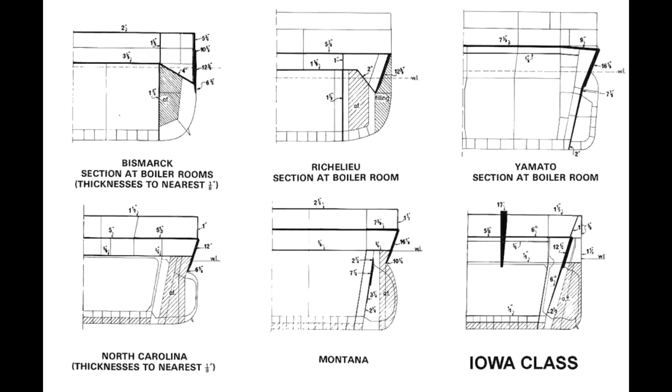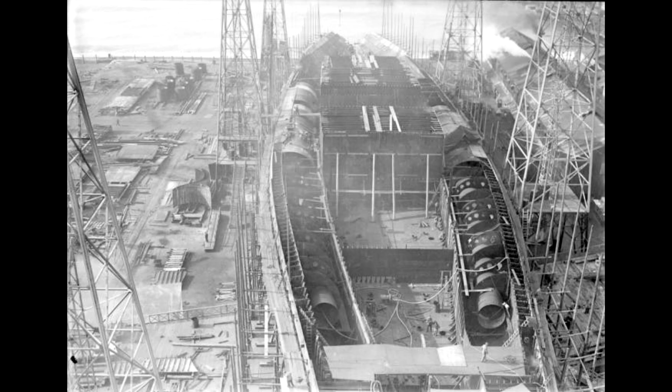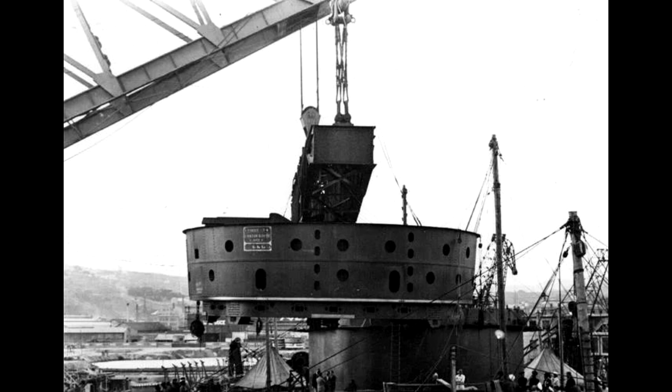Except for the Italians. During the interwar period, the Italian Navy, the Regia Marina, was trying to find a way to protect its proposed new battleships against incoming shell fire, but in a way that would give greater protection without the corresponding increase in weight that would result from simply slapping on a bunch more steel. Note that this was not because of a limitation on the Italian steel industry's ability to make thicker armour. The Littorio's turrets, for example, had 15 inches of armour on their faces. It was just an attempt to save weight generally, because weight saved on armour was weight that you could use in something else.

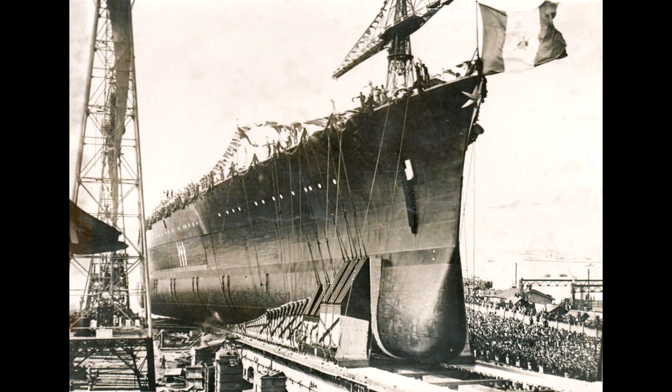But ever since, there have been discussions as to whether or not their solution actually worked, not helped by the fact that no Littorio was ever struck on its belt armour by an incoming enemy shell during the Second World War. Unfortunately, the physics and the engineering involved is somewhat more complex than standard battleship plate armour, and this means that some people on both sides of the argument deeply misunderstand what they're actually talking about.

There are some who say it just didn't work at all, and the Italians would have been better off just having the 11-inch thick internal layer. That's not correct. But there's also some who say, well, no, the Italians tested it and it worked, and therefore it works as advertised, and anyone who questions it is just being silly. And they're also wrong, because, well, we'll find out.

After some thinking and experimentation, the idea that the Italians settled on was to rely on what is known as decapping incoming projectiles. As you'll hopefully recall from the video that we did on shells versus armour, and if you don't recall that, there's a good chance to go and watch that video again, an incoming armour-piercing shell consists, at least in World War II, of three primary components. A windscreen, which is present purely for aerodynamic purposes and gives it a long pointy appearance, and has negligible importance in terms of armour penetration.

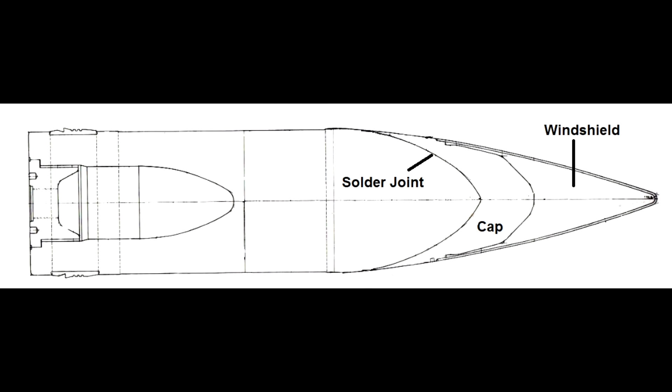Then there is a hardened armour-piercing cap, which in very brief terms essentially sacrifices itself to inflict maximum damage on the armour plate without causing the main body of the shell to suffer damage. And then you have the shell's main body, which contains the explosive charge and is capable of a certain amount of penetration itself because it is the primary mass of the shell, but it is made of a slightly softer steel that is better at holding itself together, but less capable of punching through face-hardened armour, as compared to the steel the AP cap is made of.

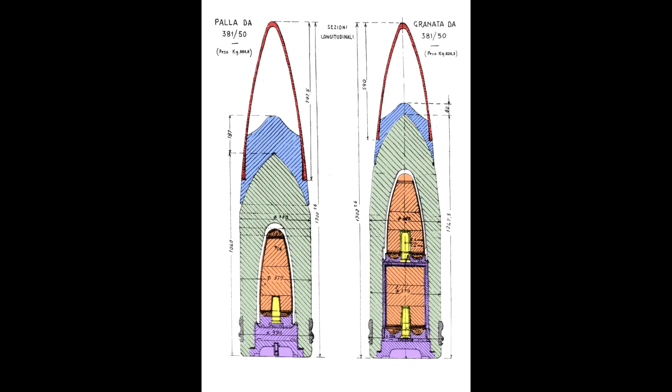Now, the armour-piercing, or AP cap, had been introduced to naval shells a little bit prior to World War I, largely in response to armour thickness and material getting good enough to be able to relatively easily resist an incoming shell that was just made up of a shell body and a windscreen. A softer-bodied shell would just collapse, concertina up like an accordion, and a harder-bodied one would shatter, assuming that you had a reasonable thickness of armour on your ship.

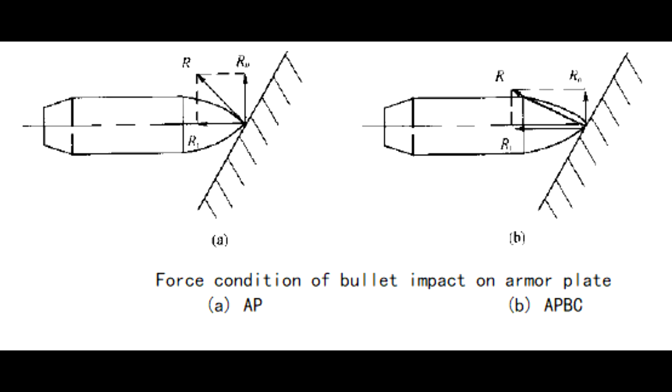Hence, the armour-piercing cap was invented, which essentially, again very briefly, split the problem of absolute penetration and coherent payload delivery into two individually solvable tasks. Due to their disposable nature, as well as certain physical interactions that required the cap and body to be somewhat separated to work, armour-piercing caps were only held on to the shell bodies by relatively minimal means. In some places, small contact points, in other cases, light soldering, in some other cases still, a little bit of crimping, and in a few cases, some combination of the above.

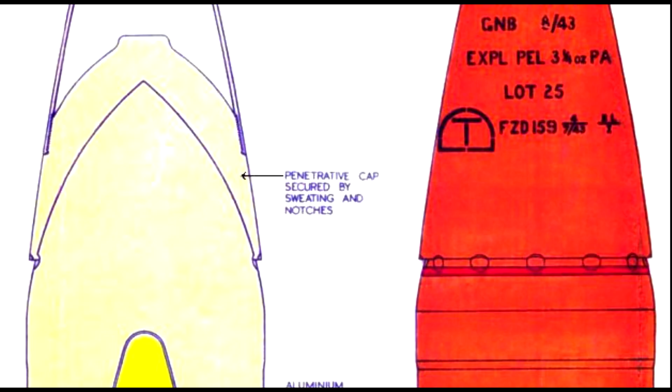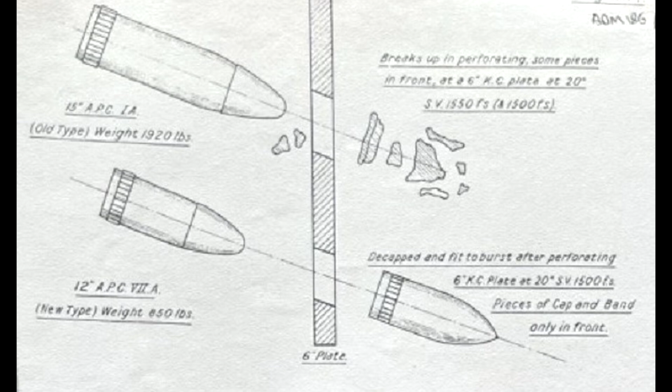So, it seemed obvious that if you could come up with a method to detach the cap from the shell prior to the shell hitting the main armour belt, then the belt itself could be made substantially thinner and thus either lighter, or it could cover a larger area, or you could do a halfway house of both, and still expect to resist incoming fire. The potential for shells to lose their caps was already quite well known in the various major navies, as another way of causing this to happen was simply for the shell to impact at a relatively large angle to perpendicular. This effect was one of the secondary reasons for the advent of deliberately angling armour belts in the early 1920s, a trend which would continue in some navies into the 30s and 40s.

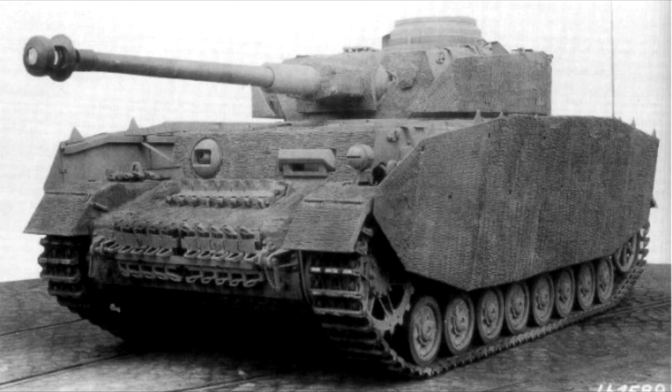The simplest way to effect decapping a shell deliberately and consistently was to just put an additional barrier ahead of the armour, so the shell would hit that first. This would just be a thinner sheet of steel. If this sheet of steel was thick enough, then it would exert enough force to break off whatever means was being used of holding the cap to the shell body, and potentially even shatter the armour-piercing cap completely if it was considerably thick, although in the latter case, a considerably thick decapping plate would probably negate most or all of the weight savings.

But since this general effect could have potential implications for certain kinds of tank ammunition, or more precisely anti-tank ammunition, as well, a number of different nations would conduct a wide range of tests using both naval rounds to look at the implication of potentially decapping incoming shells to protect ships, but they would also use smaller rounds that would typically be found in various anti-tank weapons of the interwar period to see if what we would know as spaced armour could work for tanks, specifically against capped armour-piercing shells. Of course, there is value of spaced armour against early HEAT and HESH warheads as well, but that's a separate discussion.

Now, of course, in the real world, the decapping effect of a sheet of steel would be affected by the angle of impact. But, at least for a battleship, if the alternative was a shell punching straight through intact and then hitting a thin main belt that would then also give way quite easily, it was best to assess these things according to a worst-case scenario, a perpendicular impact, or as close to as you are likely to get.

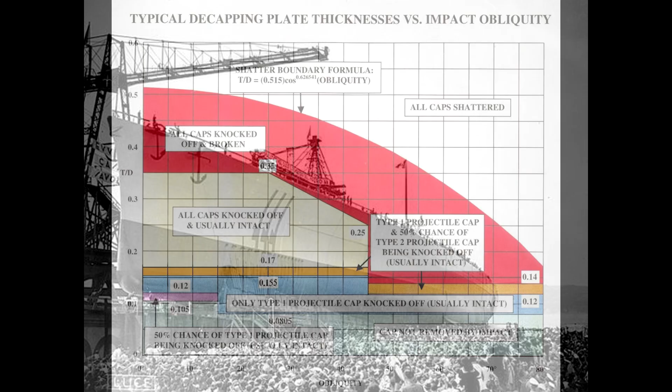Thanks to the various tests done by the different nations, it is possible to calculate not only how thick the decapping plate should be, but also how this might vary depending on the type of armour-piercing cap that a shell might be using. This has all been handily summarised in this chart by the late Nathan Okun, a fine scholar who wrote extensively on a variety of naval subjects, mostly to do with guns and armour, and with whom many of you will already be familiar. As you can see, to be on the safe side of things, while keeping the plate as light as possible, the ratio of plate thickness versus diameter of incoming shell should be at least 0.17. That's the upper boundary of the orange zone on the chart.

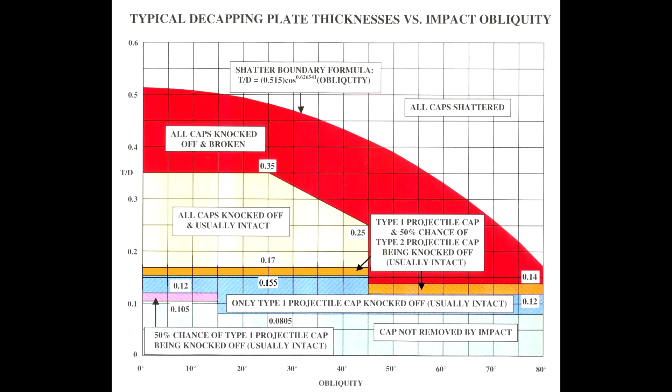So, going back to the Italians, they would test and then equip the Littorio class with an armour scheme that combined inclined armour, specifically at an angle of about 11 degrees, with the main belt being 280mm thick, or about 11 inches, which in and of itself would be immediately obvious as completely inadequate to deal with 15 or 16-inch projectiles that would be common in the late 1930s and early 1940s naval battles if left on its own, especially at the closer ranges that Regia Marina thought the battleship fights might come down to, which would be 16,000 metres or about 17,000 yards. This also, however, had a decapping plate, and that was 70mm thick, or about 2.8 inches.

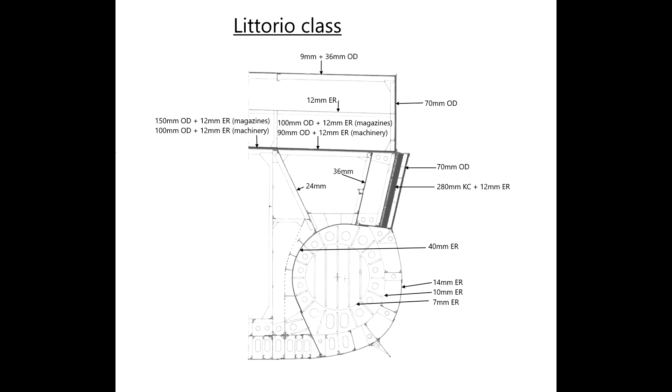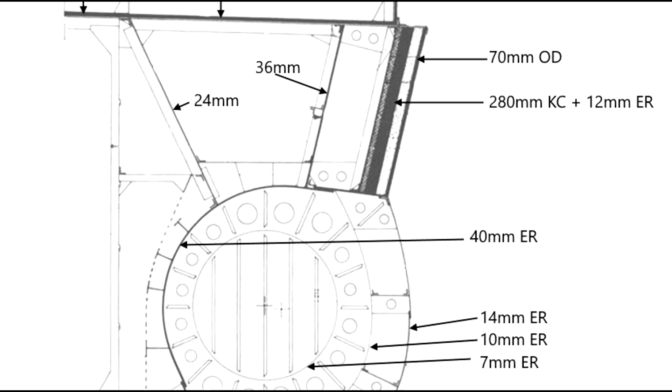So let's examine this at the first stage of things. Is the decapping plate actually thick enough to do its job? Well, the Regia Marina assumed that a 15-inch shell was its most likely opposition, and so we apply the previously mentioned ratio. 0.17 of 15 inches is 2.55 inches, and so a 2.8-inch thick plate would suffice with a little bit of a safety margin. It's in fact even 0.08 of an inch thicker than the minimum needed to be reasonably reliable against a 16-inch projectile. And in either case, the angle of the armour and the angle of fall of the shell would help a little bit with this as well.

Note, however, that 1.5 divided by 16 is about 0.094, which falls below the minimum ratio to knock any kind of cap off, even occasionally, and this is why the 1.5-inch STS outer plate on an Iowa-class battleship is not a decapping plate, something that Okun himself would confirm. Thus, the decapping plate on the Littorios should do its job of detaching the armour-piercing cap from the shell against pretty much any incoming threat, except possibly Yamato's 18.1-inch guns.

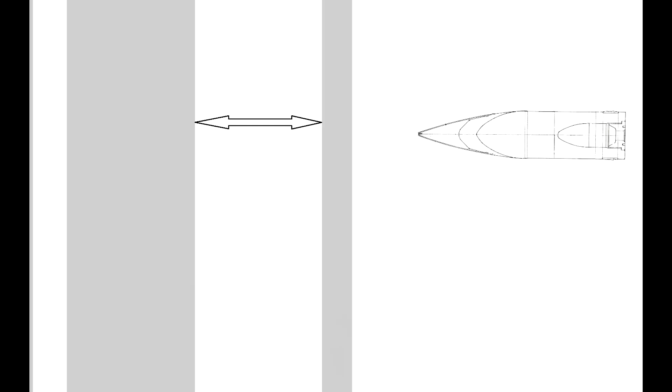But there is a second factor to consider: the distance between the decapping plate and the main belt. You see, once you've physically detached the armour-piercing cap from the shell body, i.e. you've broken the solder or contact points or whatever is involved, you then actually need the cap to physically separate from the shell by a certain distance, ideally completely. Otherwise, the cap is just sitting on top of the shell, just without anything holding it in one particular place, but then when it hits the main belt, the overall effect of that impact is likely to be similar as if nothing had actually happened at all, since the tip of the shell and the interior of the armour-piercing cap act a bit like a socket system anyway.

Plus, there is a risk at closer distances, in terms of the distance between the decapping plate and the armour belt, that the decapping plate itself may be carried wrapped around the shell to the main belt, and thus in and of itself act like an additional armour-piercing cap layer. As again we've seen in the shells versus armour video, you could get a plug of metal being knocked out of an armour belt, and this was not uncommon when heavy caliber shells hit steel. So, you need to have a decapping gap between the decapping plate and the main armour belt. And this, as it turns out, is proportional to the size of the shell impacting and the relative thickness of the decapping plate to that shell.

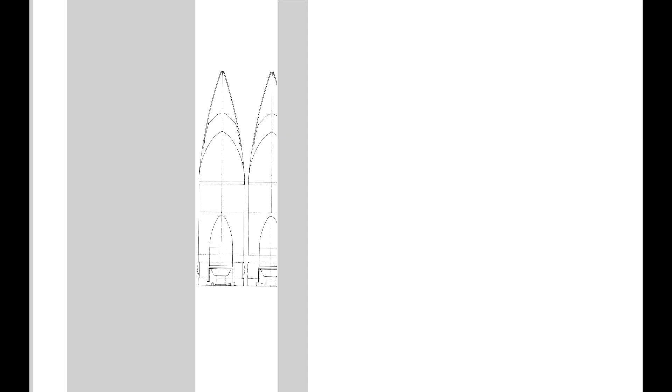In the various tests tabulated, the largest minimum successful gap recorded at a perpendicular or normal impact was about 3 calibers, and the lowest was about 1.6 calibers, with the change being related to the decapping plate to shell caliber ratio. Luckily, there is another formula that allows us to calculate the decapping gap needed, since 2.8 inches for the decapping plate, divided by 15 inches, the diameter of the shell that's being fired at it, is 0.1867. We can plug this in, and then we can see that the perpendicular impact against the Italian setup should need an intervening distance of 2.26 calibers, or about 34 inches, between the decapping plate and the main belt.

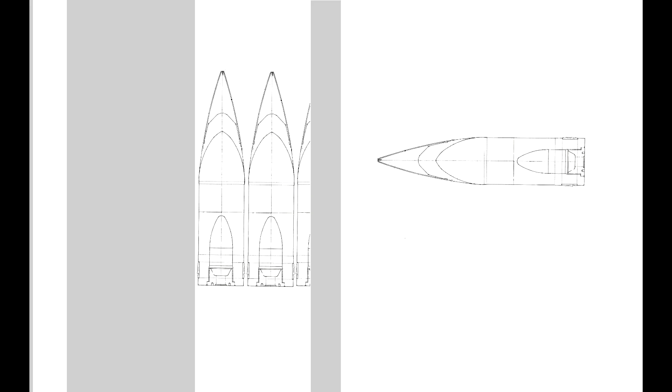But of course, the whole setup is angled at 15 degrees, and we know that the Italians were only expecting this setup to be effective at beyond 17,000 yards. So, testing against Littorio's own guns, which would have an approximately 9-degree angle of fall at that range, gives us a total incident angle of 24 degrees, 9 plus 15. This reduces the gap to 1.25 calibers. So we actually only need a gap of about 18.8 inches.

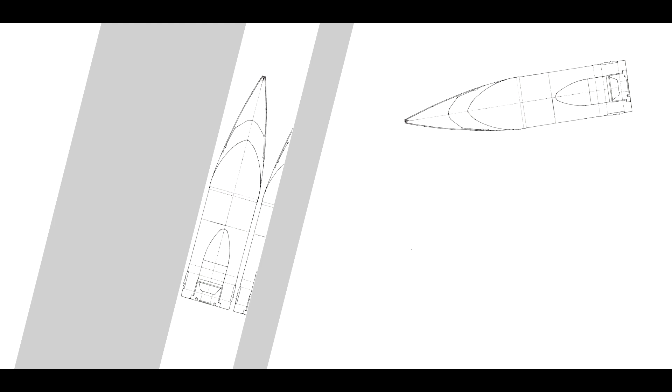Now, this is where we start to run into problems, as the gap between the decapping and main belts in the Littorios in reality is only about 25 centimeters or 9.84 inches. On the face of it, this would seem to immediately completely invalidate the armour scheme, as the distance involved is a little over half of what would seem to be needed.

Additionally, the only time the scheme was actually tested was using a 12.6 inch or 320mm round. Normally, using a smaller gun to test armour is fine to a degree, since the main thing that you are testing for is impact energy.

As we established in the video on shells versus armour, these tests were usually not carried out at true ranges, but rather the charge in the gun was reduced, thus reducing the muzzle velocity, and the angle of impact on the armour was modified, usually by changing the angle of the armour plate being tested, so that the shot could be taken at short range, where a hit could be guaranteed, but the angle and energy involved in the impact would be the same as if the shell had hit from much further away.

Therefore, within certain boundaries, you could actually test to see what would happen if a 15-inch shell hit using a 12.6-inch shell by simply not reducing the 12.6-inch shell's charge by quite as much. And this would give you, assuming you did your calculations properly, a 12.6-inch shell that would hit at a given angle with the same amount of kinetic energy as a 15-inch shell hitting at that angle, simulating a particular range,

But unfortunately, in this case, as we've established, the diameter of the shell actually matters for the decapping effect, which is largely independent of the energy of the impact, providing that the speed of the shell is above a certain amount, which is considerably lower than even extreme long-distance shots under realistic conditions, and so we can essentially ignore that factor.

What this all adds up to is that the same 2.8-inch decapping plate represents a 0.1867 caliber thickness to a 15-inch shell, but a 0.222 caliber thickness to a 12.6-inch shell, meaning that the same thickness of decapping plate is going to be considerably more effective against the smaller shell.

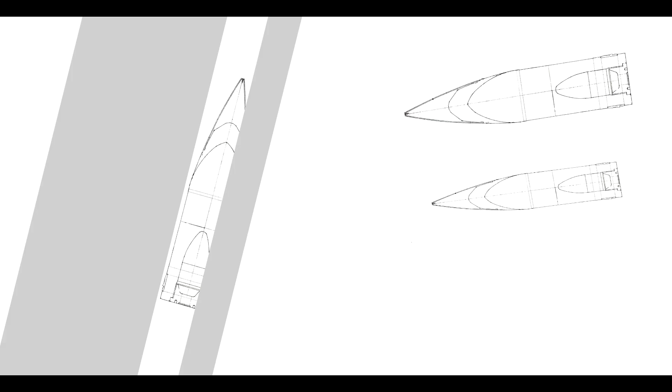And indeed, using the same 24-degree angle of descent, which is what they would have tested for, since otherwise the Italians were testing for a 15-inch shell fired at 16 kilometers or 17,000 yards, the decapping distance to decap a 12.6-inch shell decreases by about an inch to 17.82 inches. Now, this is also still well in excess of the 9.84-inch actual distance between the plates, but proportionally, it's about 55% of what's needed as opposed to about 52% if you use an actual 15-inch round.

And that, in turn, brings us on to our final mystery, because, you see, in other tests done to look at this situation, Krupp over in Germany had found that if you just filled the gap in with concrete between the decapping plate and the belt, you could cut the decapping distance by approximately half, thanks to the concrete having significantly greater resistance than air, and thus acting to split up the shell and cap faster.

This would seem potentially to be a solution, since using concrete would put the system's effectiveness at just about marginal for a 15-inch round, which would make sense, as that is actually the lower boundary of range the Italians expected the system to be effective at.

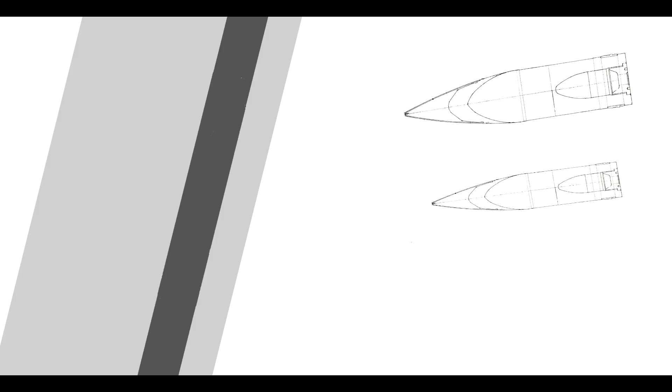But not so fast. You see, concrete has a density of between 2.2 to 2.5 tons per cubic meter, depending on your mix. That is much lighter than steel, which hovers at around 7.7 to 8 tons per cubic meter, but it still represents a fair old bit of weight, bearing in mind that the decapping plate normally has a relatively marginal effect on the shell's velocity and thus its overall armor-piercing value if the cap doesn't detach.

In the Italian system, if they had used concrete in the German fashion, you would then have a weight per square meter of the 280mm steel main plate, then the weight per square meter of another 250mm of concrete, and then another 70mm of the steel decapping plate. This adds up per square meter to 2.754 tons of steel and then another 600 kilos of concrete if we use typical density values from the ranges we mentioned a minute ago.

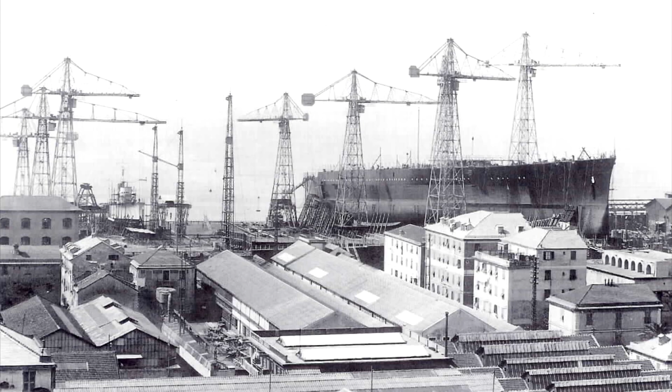So this gives us a total mass for the Italian armour system of 3.354 tons per square meter. That in turn equates to the same mass as a single steel plate 426mm or 16.77 inches thick, which would be somewhat thicker than the main belt of a Yamato-class battleship, and at a 24-degree total angle of fall, bearing in mind the angle of the armour and the angle of the shell, this would represent an approximately 18.35-inch or 466mm equivalent thickness of steel when Littorio's own guns would fire at it at a range of 16 kilometers or 17,000 yards.

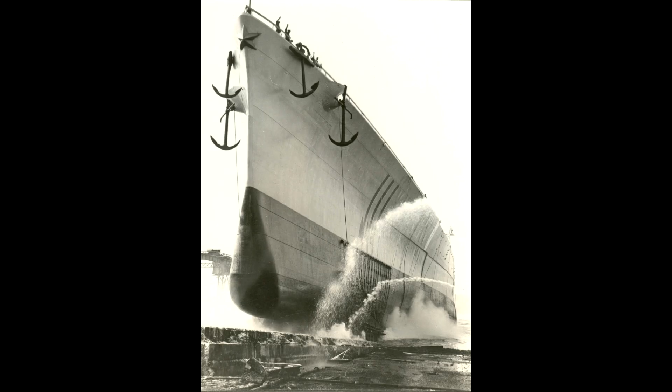Now, using the Regia Marina's own test figures and calculations for general penetration, this would suggest that a single inclined belt of the aforementioned thickness, because this is the same mass, would protect the ship down to about 15 kilometers, which is a significant improvement. Or if you just wanted protection down to 16 kilometers, then you could save about 5% on your armor weight by thinning the plate out. So in this scenario, using concrete as an infill, the Italian setup would work, but it would be somewhat inefficient and overly complex, being a little bit heavier and a little bit bulkier than it needed to be as compared to just making a big slab of steel.

However, the Regia Marina didn't fill the gap with concrete. Well, they kind of did. They used foamed concrete. Now that would save between 200 and 500 kilos per meter squared, depending on the density, as foamed concrete ranges quite widely depending on the mix. Now, if we say that perhaps using a given mix of foam concrete you would save about 300 kilos per meter squared, thus reducing the overall mass of the system per meter squared to about 3 tons, which is a nice round number, that would equate to a single plate thickness of about 15 inches, which would then put the protection of the Littorios using a single plate roughly on a par with that of the King George V class.

However, this thickness of plate would, using the Italians' own testing figures, only offer resistance at a 90-degree angle down to about 19 kilometers or 21,000 yards, which would be about 3 kilometers less protection than desired. So it would seem that using foamed concrete is the winning factor. The scheme works in terms of saving weight, but giving you a better resistance than the equivalent weight in solid steel, even if it is a little bit bulkier than that.